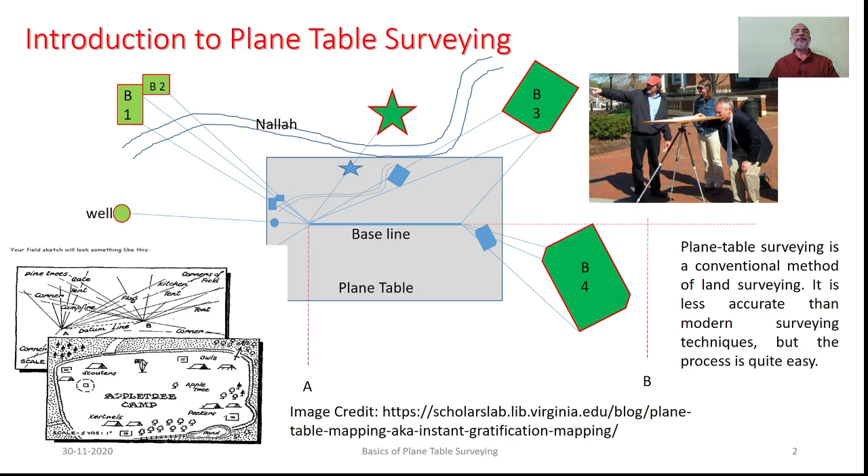So, as we got introduced with the concept, it is a graphical method in which field work and plotting are done simultaneously. It is one of the most rapid methods. It is easier. It is also cheaper. No costly spares are involved. That's why it is cheaper. The topographic features to be mapped are in full view. Hence, omission of features is not possible.

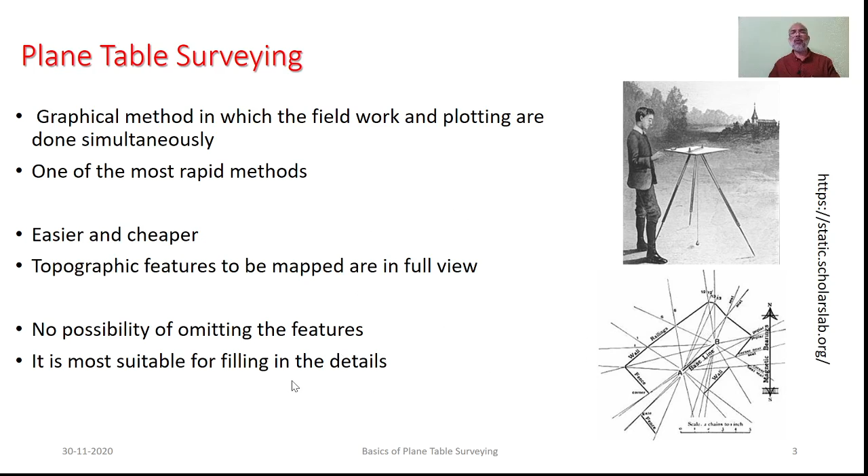Even one can make use of this technique in order to fill in the details. Say for example, if you are working with some theodolite traverse, which is quite a big one, and now we wish to plot the details of a portion of the traverse surveyed, which is called filling in the details. So here this technique will be very useful for filling in the details for major traverses.

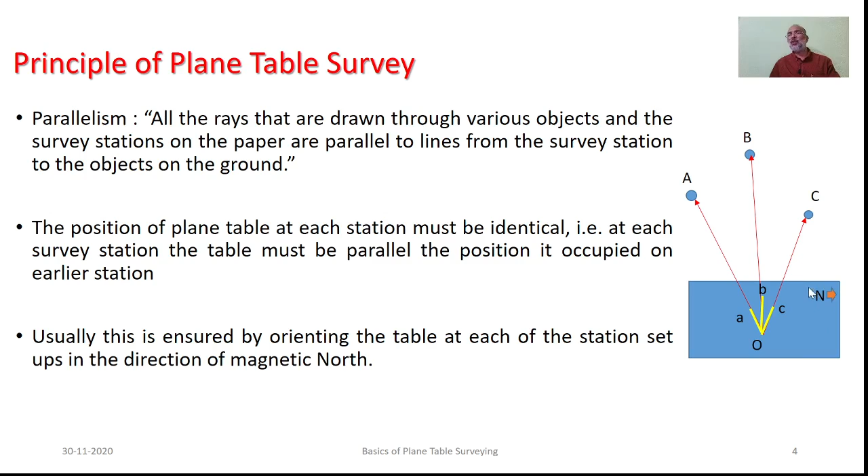In order to observe this principle, the position of the plane table at each station must be identical. That is, at each survey station, the table must be parallel to the position that it occupied at the earlier station. Usually, this requirement is satisfied by making use of magnetic north or a suitable meridian that is chosen as one starts the work.

Let's try to understand the various accessories that are involved in plane tabling. The essential requirement is the plane table. It is essentially a drawing board made from well seasoned wood with its upper surface plane and smooth. It is rectangular in shape and normally its size is 60 cm by 75 cm.

This table is mounted on a tripod and it can be revolved about its vertical axis and it can be clamped as and when required in the direction that the surveyor is interested in.

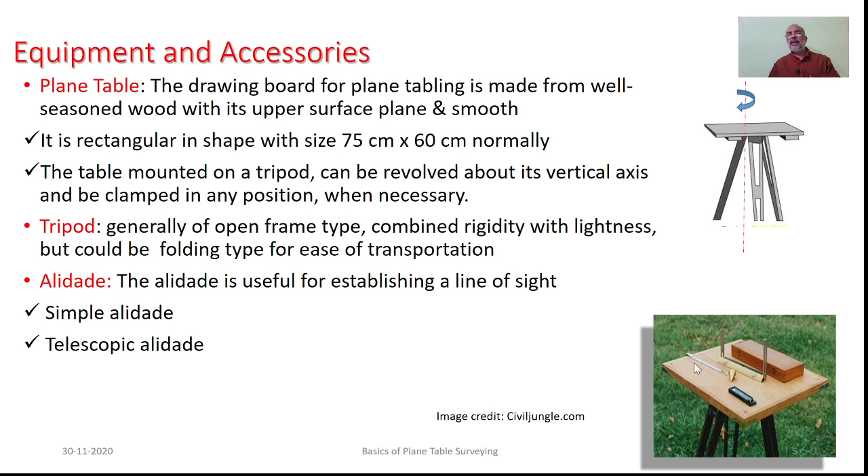Usually, this particular tripod is open frame type. It combines rigidity with lightness. Sometimes it could also be folding type for ease of transportation. It is also equipped with some of the accessories that we will be discussing subsequently, but the essential one is the alidade, which in turn can be simple alidade or telescopic alidade.

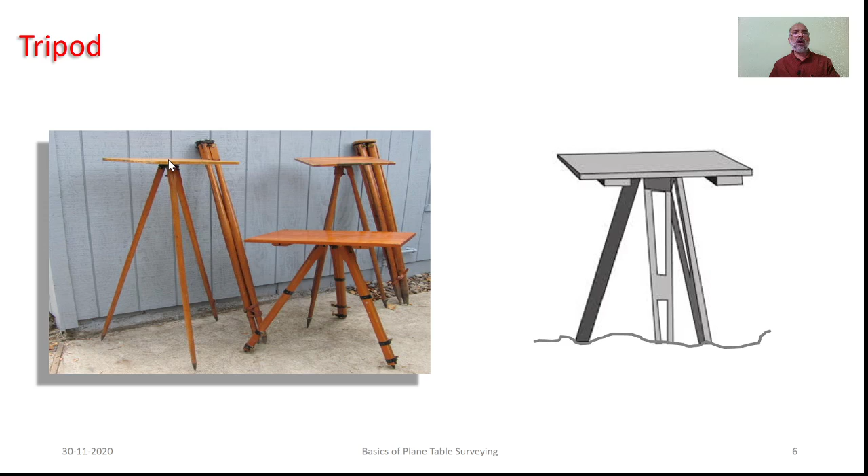So here this is what you see. There are a variety of tripods. Essentially it could be open A frame type. Here the head of this particular tripod is provided with a certain fly nut assembly which facilitates clamping and rotation of the plane table about the vertical axis.

So this is about the plain alidade or simple alidade. It is used for ordinary works. Usually it is a wooden or brass ruler of 50 to 60 centimeter length. It is also called a sight rule. The way you see here, it has a trapezoidal section which is provided with beveled edges. It is comparatively heavy so that it would remain stationary at the requisite position.

It is provided with the eye vane at one end and the object vane at the other end. The eye vane is normally a rectangular window. The observer can look through that rectangular window, and on the opposite side the object vane is provided with a vertical horse hair so that the line of sight joins the window at the observer end and the other at the object end.

As such, the line of sight joins the eye vane and object vane and helps to bisect the object under consideration. The base of this alidade is provided with a beveled edge, which is called the fiducial edge. This fiducial edge is helpful to draw the rays towards the object under consideration. Sometimes it is provided with graduations so that it can be used for plotting the dimensions actually measured on site, reduced to the requisite scale.

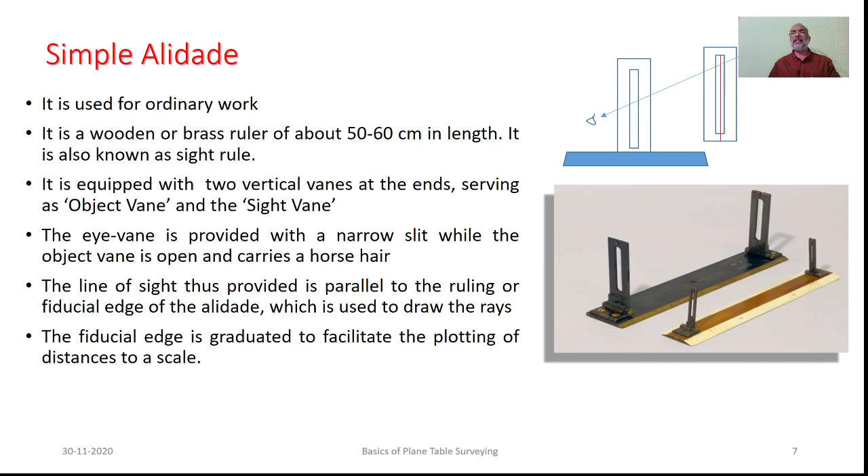The other type of alidade is the telescopic alidade. The way you see, the lower portion is very similar to the plain alidade, but it is not equipped with the eye vane and object vane. Here, it is provided with some kind of level tube or round level in order to facilitate the horizontality of the base. In addition, it is provided with a spindle, a graduated arc, and a telescope with eyepiece and object glass.

As and when required, by making use of the clamping screw, we can release the telescope, and it can be moved in the vertical plane to sight objects above or below the line of sight. So this telescopic alidade will serve many purposes. It may even act as a level to record levels, sight objects, and determine the elevations of objects lying above or below the line of sight. It can also facilitate the contouring operation. So it has many applications in plane tabling.

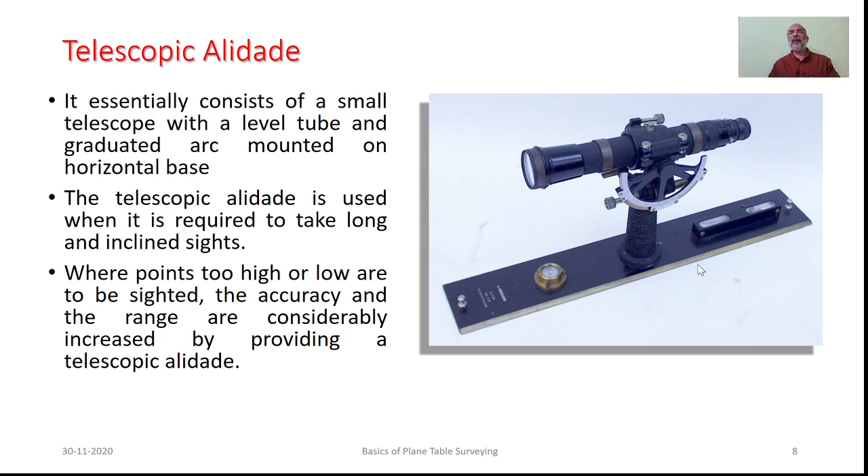As we discussed in the previous slides, in plane tabling the fieldwork as well as the plotting is done simultaneously. Hence, one of the accessories is drawing paper along with drawing accessories. One of the important operations in plane tabling is to transfer the ground station onto the paper or vice versa, that is, to transfer the position on the paper to the ground. To facilitate this, we make use of the U-fork provided with a plumb bob.

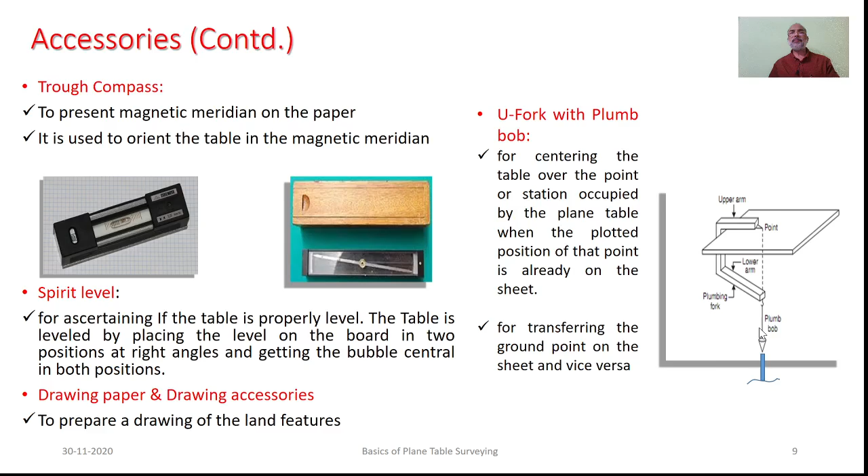So, setting up the plane table and carrying out the temporary adjustments need specific attention as far as plane tabling is concerned. So, the first thing is fixing the plane table on the tripod. This particular plane table needs to be properly fixed on the tripod stand. White drawing sheet is then placed on this particular flat table and properly fixed with certain clips or even the press pins or thumb screws.

During the whole process of this particular plane table surveying, one must take care that the position of the paper won't be misplaced. Now the next thing is leveling the plane table. So the plane table is properly leveled by using spirit level. The plane table should be parallel to ground surface initially.

Then on the top of this particular table, we keep the spirit level tube parallel to any face. We bring the bubble at the center of its run by tilting this particular top of the table by making use of tripod, or otherwise if some equipment are provided with ball and socket arrangement, it can also help in order to bring this particular surface into horizontality.

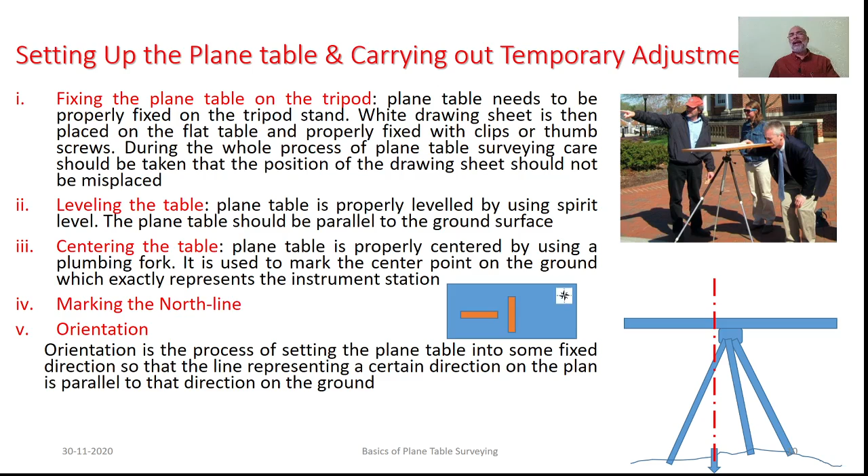Next thing is centering operation. So this particular line should be passing through the peg on the ground as well as the position that is marked on the paper. And finally, we'll mark the magnetic north direction in the upper right corner.

There are certain advantages of the plane table surveying. In fact, as we measure in situ conditions and as we plot the features on site condition itself, it is a unique technique of land surveying. The way we discussed initially, all the field that we are working on is in view, hence there are very small chances of omitting the land features to be surveyed.

The way you see here, this is certain station A, this is certain station B. With respect to station A as well as B, we can mark certain stations alternatively like C, D, E, etc. So accordingly, though we are simply interested in plotting station B from A, we can produce the ray towards say C. If possible, we can measure that particular distance AC, we can reduce it to some scale and we can have that particular AC referred.

As we go to station B, we have to carry out that orientation operation, and as we produce the ray from B towards C, it should pass through the earlier marked position. As such, the errors and mistakes can be checked while preparing the drawing on the site itself.

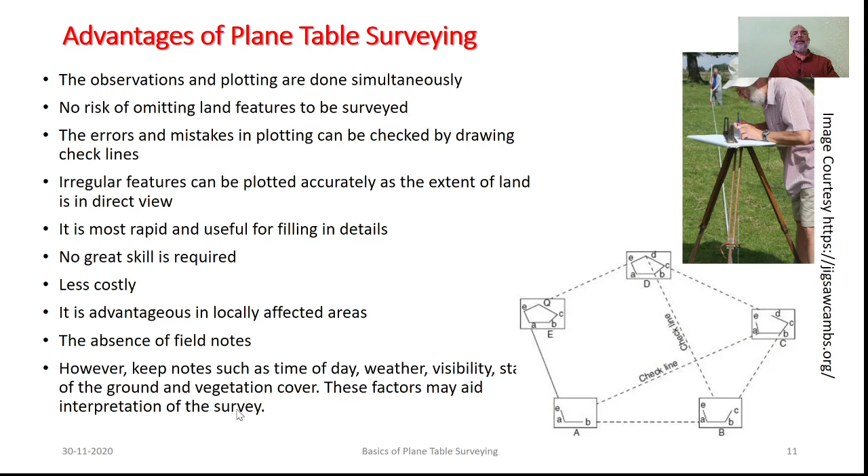In other surveying techniques, field recording is essential because those recordings are used for the plotting purpose. Here, as we are plotting the features on site itself, there may not be need of field notes, but there could be some features which are not plotted. For example, time of surveying, the weather condition, visibility, the position of the station on the ground, vegetation cover, and other such information which may aid the interpretation of this surveying operation.

In addition, we must think about the disadvantages of plane tabling. Obviously, we are making use of paper in order to prepare the drawing on site. As such, it is not suitable in wet climate. If it is a densely wooded country, we may not be able to sight the features, hence we won't be able to plot the features.

The absence of measurements is inconvenient if the survey is to be replotted to some different scale in the office. As we discussed, we need a trough compass, the plumbing fork, the plumb bob, pencil, and many such accessories. So it is awkward to carry all these accessories. The setup is usually heavy.

One more thing is, we do not expect it for very accurate results. Having the setup very bulky, it is inconvenient to transport. As it is awkward and we need many accessories, there are quite a few chances of losing accessories on a particular site.

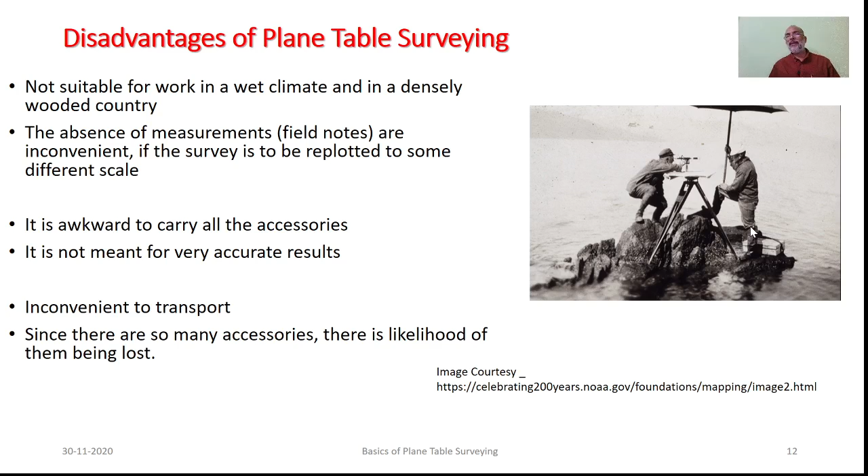This sketch is depicting most of the things. The way you see, the surveyor is standing in a very awkward position. A water body is there. One assistant is using an umbrella. Still, as the surveyor has got that kind of skill, he can make use of this technique even in adverse situations.

Orientation is one of the important processes. In fact, it can be treated as the heart of plane table traversing. It is the process of setting the plane table in some fixed direction so that the line representing a certain direction on the plan is parallel to that direction on the ground. It can be facilitated by making use of a trough compass or another technique of backsighting.

So the way you see here, work is started from station A. The way we discussed earlier, the last step was to orient the table, after marking the north direction in the upper right corner. Now, all the relationships of the lines will be established with that. So if this is the magnetic north direction plotted at station A, it has to be parallel to the magnetic north direction prevailing at that site.

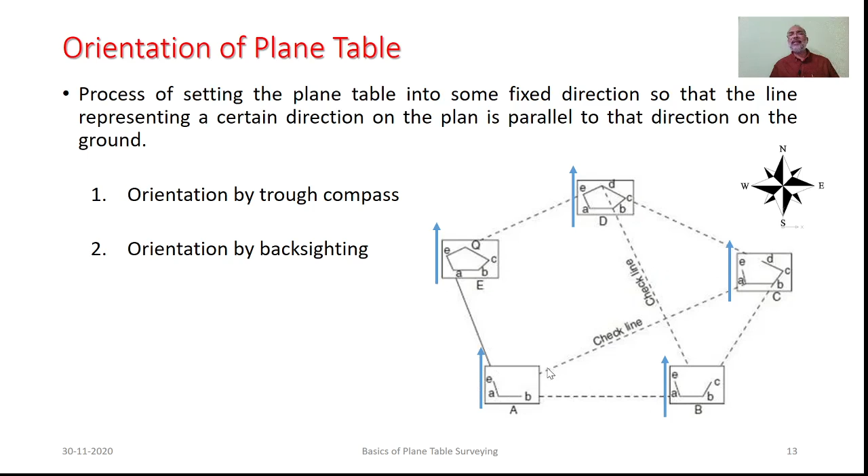Now, as we move further to station B, again the magnetic north direction on the paper and that existing on the ground should be made parallel to each other. That is, the setup at B is identical to the setup at A. As such, while moving from A to B, B to C, C to D, D to E, and coming back to A, following this traverse A, B, C, D, E, A, all the setups are identical to each other.

Let's try to understand how we can make use of the trough compass. For example, this is station A, that is instrument station 1, and this is station B, that is instrument station 2.

Initially, we have occupied station A. So, we have plotted the magnetic north direction by making use of trough compass. We have drawn the ray towards station B. By making use of some scale, we have reduced it as small b as far as positioning on station A is concerned. Now, with respect to A, what are the features that we wish to plot? That can be plotted by making use of suitable plane tabling methods.

Now, as we move to station B, here the plotted position small a, small b should be parallel to capital A, capital B, which is nothing but making the second position of the plane table identical as it was on its earlier station. In technical terms, we'll be orienting the plane table at station B in the similar manner the way it was at station A.

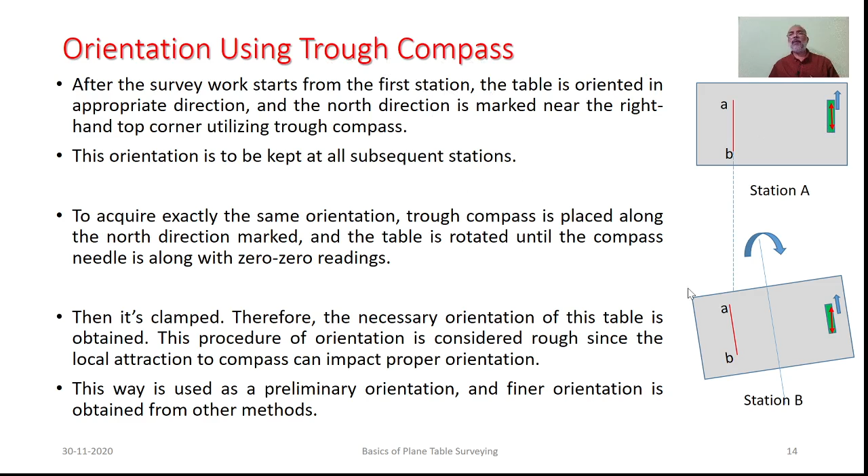Needless to say, trough compass works with the magnetic needle. If there is certain magnetic influence, naturally, because of such local attractions, we cannot achieve the orientation correctly by making use of trough compass. Hence, we can make use of second method.

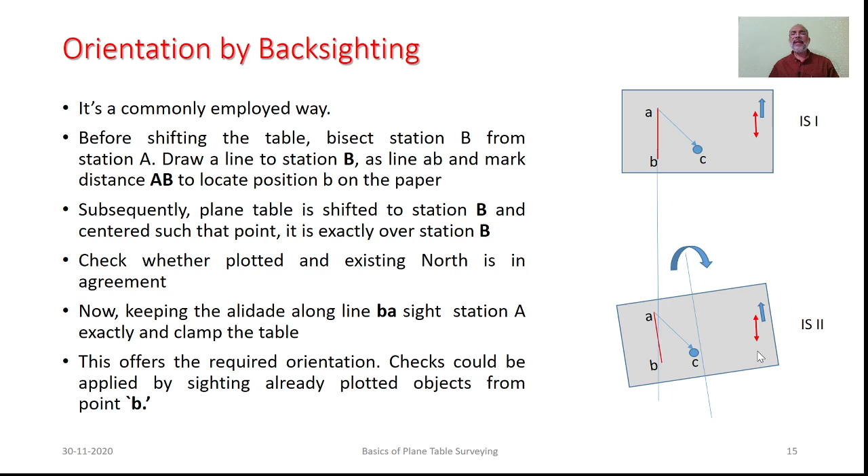Further, the way we discussed previously, through b, now we can sight station C. As we have the plotted position of this particular station C, from B also, the ray must be passing through that particular station c. As it is done, we can say the orientation is correct.